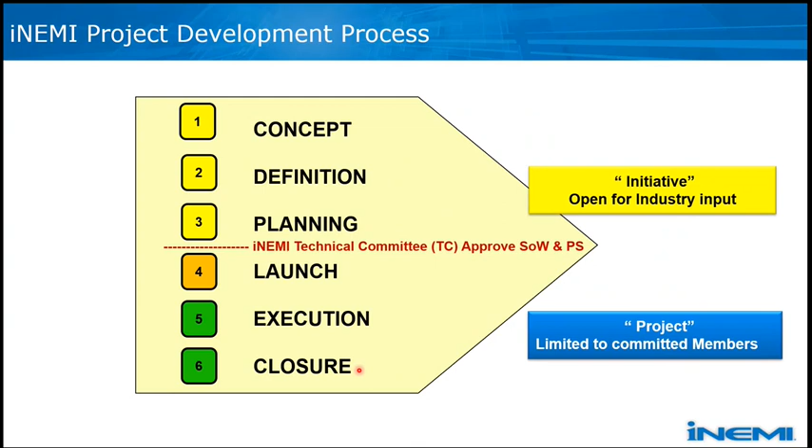So as mentioned, we have two documents governing the project. One is the statement of work. It defines the project scope, background, objectives, needed resources, materials, etc., and also the detailed schedule and tasks. We have another document called the Project Statement Agreement. This document needs to be signed by companies who want to participate. This is to secure the commitment on resources and the terms defined for project management, and also compliance with iNEMI bylaws. So as mentioned, for project execution after launch, this project will be run in a closed group.

The iNEMI membership will be required. This is to provide a legal framework so that companies who join this project don't need to sign additional NDAs and other documents, but they comply with iNEMI bylaws and agree with the iNEMI IP policy and the project management rules. Those are already defined in the membership legal documents and also the project statement specifically for this project.

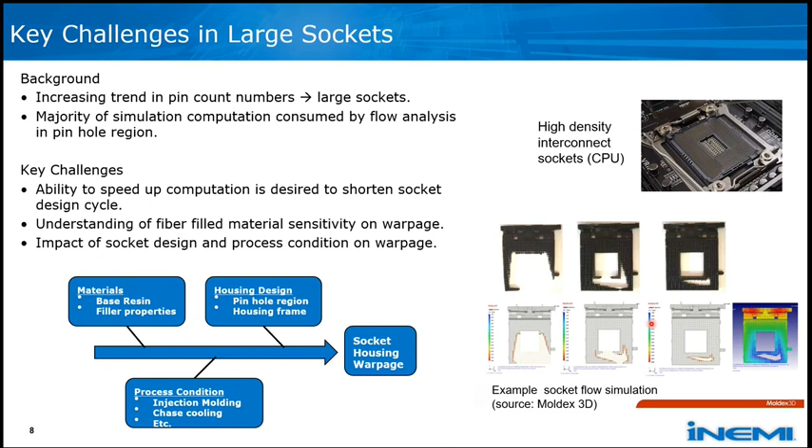So this is the recap or summary from phase one, the key learnings and observations. In phase one, the team established an analysis and validation framework for this socket development. They also built the socket and conducted some measurements in order to validate the room temp warpage between modeling and the actual measurements.

And also to understand how the socket design impacts the warpage, for example, core-out and without core-out design, and how that impacts the package warpage. And from the effort to speed up the simulation time using a simplified approach, the team observed a significant increase in efficiency, reducing simulation time, while at the same time achieving reasonable accuracy compared to the complex or original model. And also, we do see some gap in terms of the high temp warpage prediction.

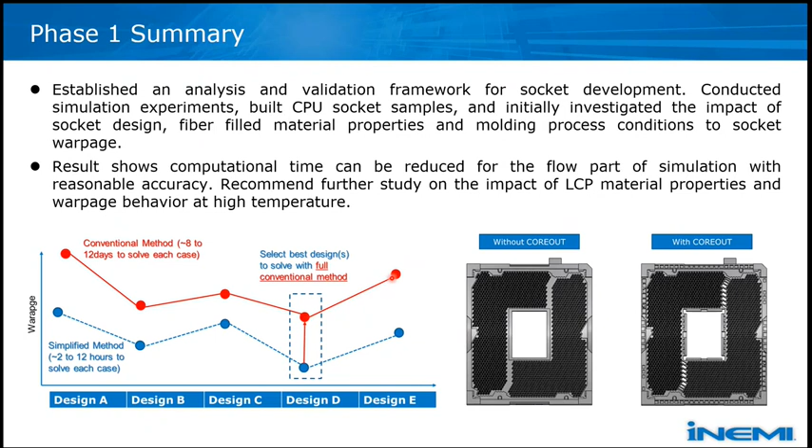So at the end, once we lock down the best design, we can explore the option to use the detailed pinhole design to further investigate the impact to the warpage. Then the next is about the LCP material. This will talk about the benefit of the LCP material used for this socket design. LCP stands for liquid crystal polymer. This liquid crystal polymer in particular offers a few benefits over other material sets.

The first one would be high flowability. From this spiral flow test, we can see that LCP has higher flowability, which means you're able to fill a tiny gap without any major concern. The second one is no flash, which will enable faster cycling. The next one is dimensional stability. LCP offers good dimensional stability because of its lower CTE and lower water absorption, which is preferred for manufacturing.

The third one is SMT process eligibility. From this chart, you can obviously see that LCP has the highest HDT temperature as compared to other material sets. And the final one is dimension precision. It offers very good dimension precision because the volume change from the liquid or molten stage to the solid stage is very minimal.

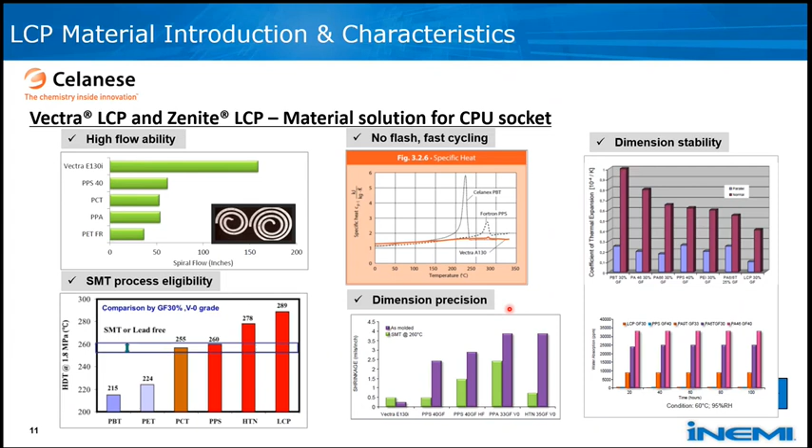This is to highlight 3 sets of LCP material that have been selected since the phase 1 activity. These 3 materials will be carried forward into phase 2, because we need further study to understand the material behavior with respect to warpage. These 3 are Vectra E488i, Vectra Fit 30, and Zenite 5145L.

From the filler standpoint, both Vectras have 43% glass and mineral, and Zenite is 45% glass. Both of these have high flowability and low warpage. And Zenite in particular has very good weld-line strength. That's the reason why these 3 materials have been selected, in order to understand the impact to the warpage.

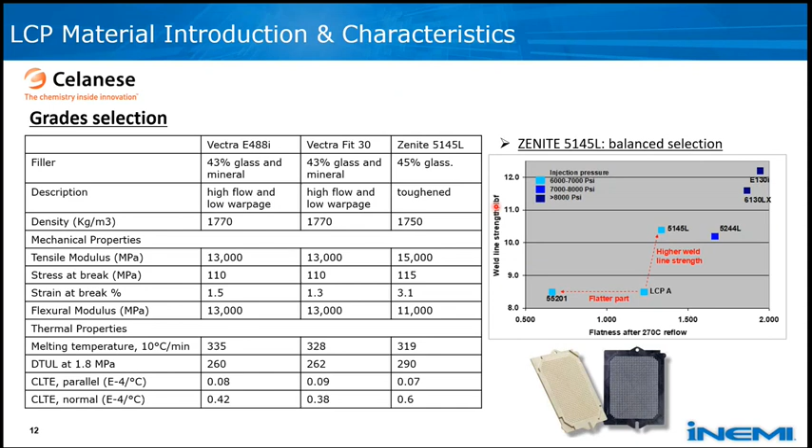This page will share the simplification effort that has been carried out. The whole objective is to reduce the simulation time while maintaining reasonable accuracy compared to the complicated pinhole design. In phase 1, the team chose this LGA socket, 61 by 51 dimension, to begin with. The idea is to keep the same socket geometry while reducing the surfaces for the pinhole in order to improve the simulation time.

As you can see, this is the pinhole design for the original model. It consists of 18 surfaces per pinhole. Simplified model 1, using a cylindrical shape, is reduced to 1 surface per pinhole. Simplified model 2 is reduced to 4 surfaces per pinhole with a square geometry assumption. Then this is the total solid mesh count, comparing the mesh count that can be reduced if we use the simplified approach.

In this particular model, we have without core-out and with core-out. In general, we see a significant reduction in mesh density using simplified models 1 and 2, because the number of surfaces has been reduced significantly. In terms of the CPU time, we see a significant improvement as well. For the case without core-out, roughly 2x improvement, and for the case with core-out, more than 4x improvement in simulation time.

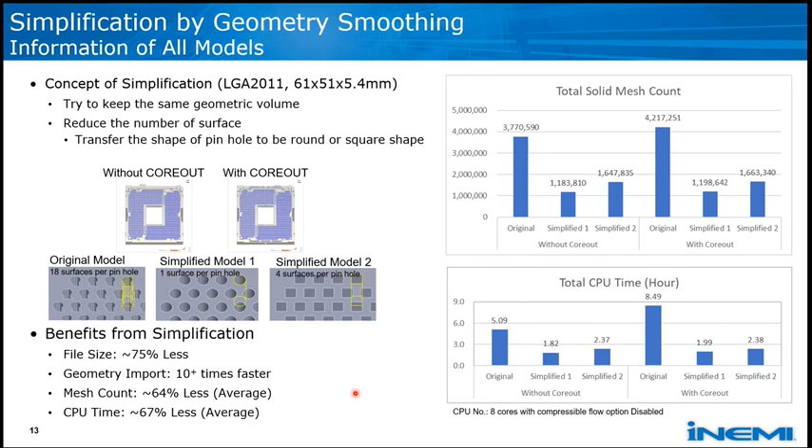The next one is the filling pattern validations, or the comparisons between the simplified versus the original model. We have two types of socket design, without core-out and with core-out. This is a filling pattern at 70% fill.

From this comparison, we can see that simplified model 2 actually predicts quite close proximity as compared to the original model, for both with and without core-out design. We do observe that model 1 slightly over- or under-predicts the filling pattern as compared to model 2 or the original model.

This is because the pitch, the gap between the pinhole, the cylindrical pinhole, is actually larger with the cylindrical assumptions. This reduces the flow resistance, and that's the reason why it caused under-prediction or over-prediction of the filling pattern with model number 1.

So from this study, the team has concluded that we will use model 2 to simplify the pinhole geometry.

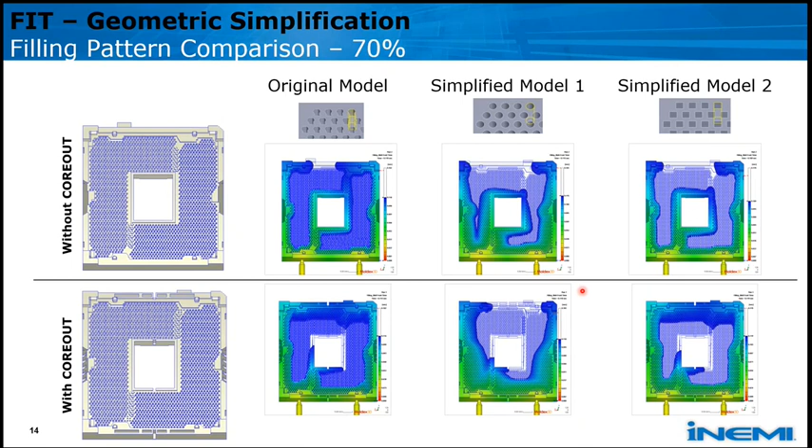After we completed the filling, the next step is to predict the socket warpage before and right after the part is ejected to room temperature. That is also a key concern because the warpage of the socket is also influenced by the process and the material set. Our partner has carried out this socket warpage analysis.

This is from Moldex. The effect of the socket warpage is actually a combination of two major factors. The first one is random fiber orientations, meaning the fiber distribution inside a socket is assumed to be randomly distributed. The second one is fiber orientation effect displacement, meaning you consider the effect of anisotropy of the fiber orientations.

So whether the fiber arrangement is in the flow direction or perpendicular to the flow direction, that will impose an anisotropic material behavior that eventually will impact the socket warpage behavior.

From this modeling comparison, without core-out and with core-out, we do see that the design with a core-out actually reduces the socket warpage at room temp as compared to the socket without core-out.

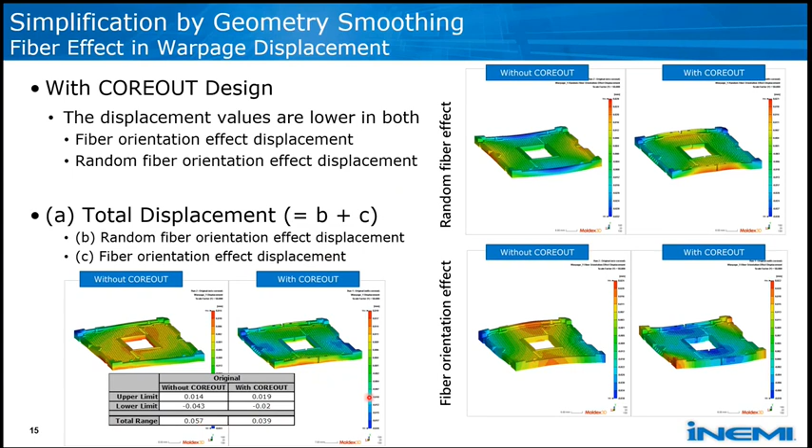With that, I have concluded the phase 1 summary. Hopefully that will give the audience a good idea on the activities that have been achieved in phase 1.

Moving forward, I'm going to talk about the project phase 2 objective and scope. Phase 2 is basically an extension from phase 1. Whatever gaps we observed in phase 1 will be further carried into phase 2 to conduct a detailed study. The first one is to enhance the socket modeling capability and material characterizations to predict the filling pattern and warpage behavior.

Because we do see some gap from phase 1 in our room temp warpage prediction between modeling and measurement data, we also aim to characterize the impact of molding and design on larger sockets. The third objective is to develop a guideline for these socket warpage measurements.

The scope will be larger when we move to phase 2. We'll cover and focus on both room temp and high temp socket dynamic warpage, because the team is interested in understanding how a socket warpage behaves when subjected to the reflow process.

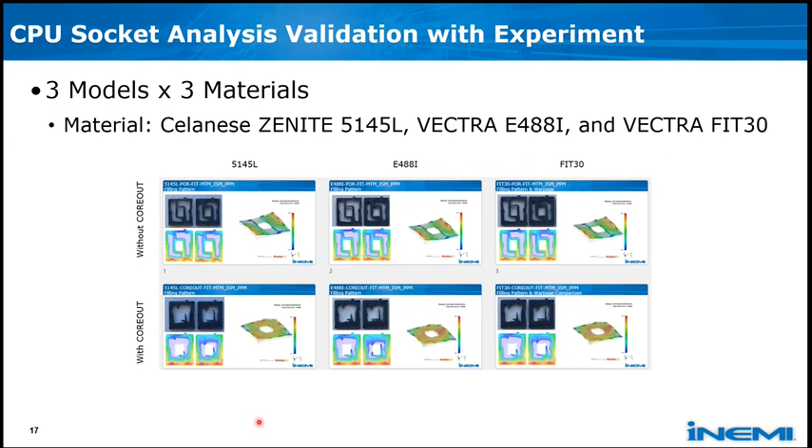This point is basically about the potential coreout location, as I mentioned in the phase two scope. In phase two, we plan to use simulation to have upfront process optimization to decide the optimal location or position to place the coreout design, in order to reduce the shrinkage of the socket and also reduce the socket warpage. After the modeling optimization is done, we'll get our partner, FIT, to build the socket and eventually validate the observations or predictions from the simulations.

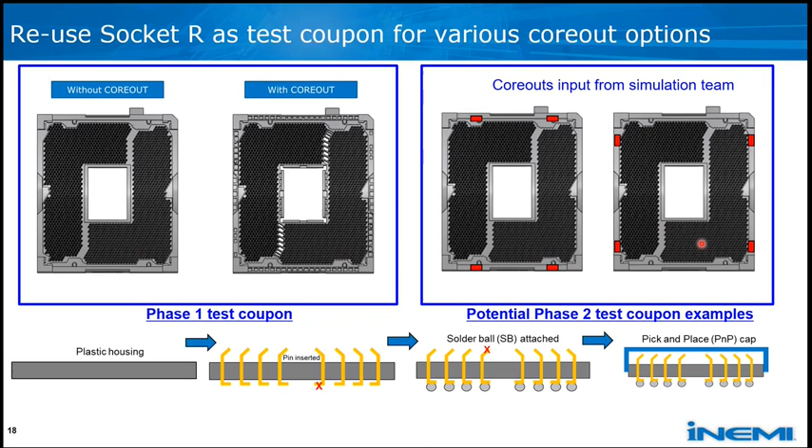The overall study is estimated to complete at the end of Q4 this year, so that we can have a report out on the findings from the team effort.

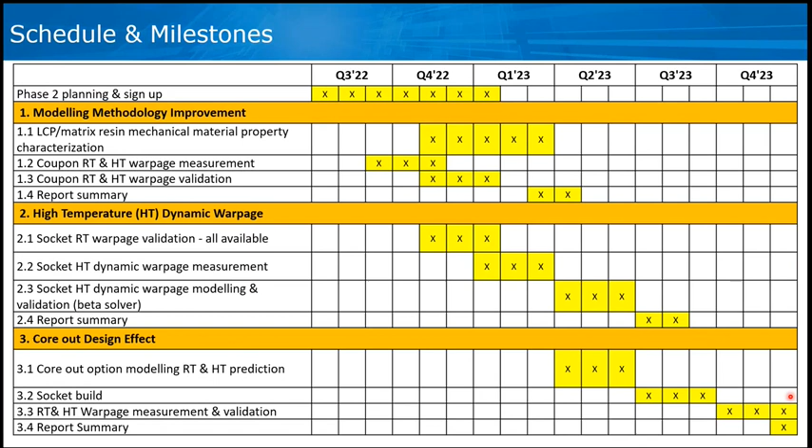So I think with that, I've concluded the project detail sharing. Haley, I would like to pass back to you so you can continue.

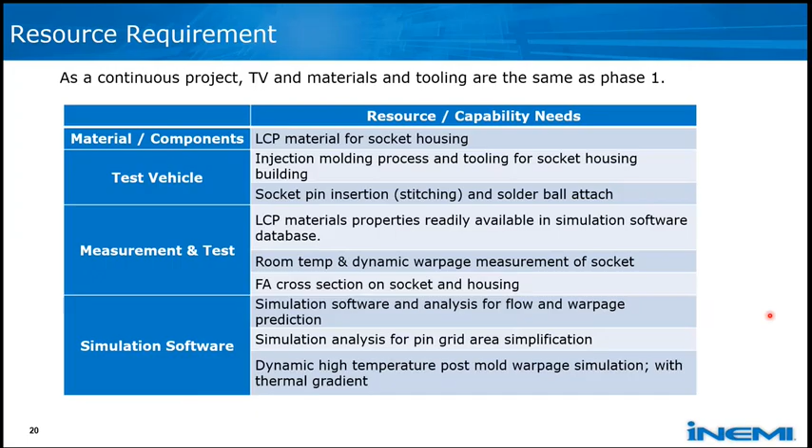In fact, we have both Insidix and Akrometrix on that, they both do the measurement on this project. Regarding the solder ball removal, I wonder if Ron wants to comment on that. I'm unaware in my experience that removing the solder balls - I guess it depends on how you're removing them, whether you mechanically polish or grind them off, or whether you thermally reflow and wick the solder away. It's not my experience that I've seen a change, but to be honest, I haven't explicitly ever checked before and after. Regarding comparing digital fringe projection to shadow moiré, again, as Haley stated, we have both Akrometrix and Insidix providing characterization support, but I think they're both using DFP technology. So DFP has the advantage over shadow moiré that discrete displacements in the vertical axis don't cause any real issues. So I don't know that we're going to compare shadow moiré to DFP because we're strictly using DFP.